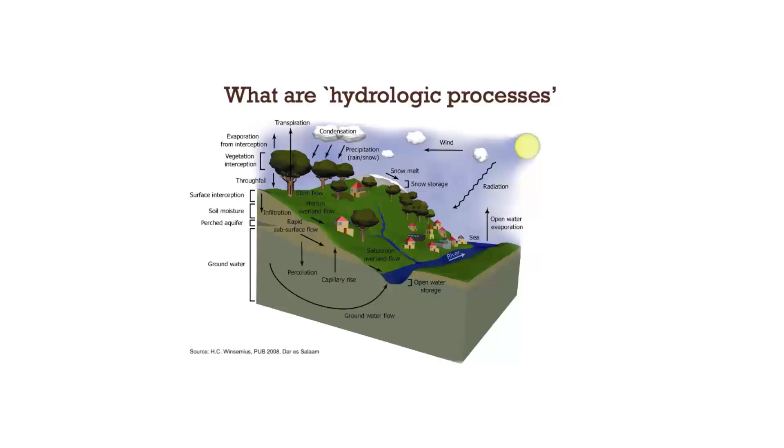Here we want to appreciate this process of the hydrological cycle, which is in short the water cycle, the water balance. After the rain, the whole process of condensation occurs, then it comes along as stem flow. Some water is evaporated, infiltrated, then moved down to the river as runoff, then exposed to bigger water bodies like the ocean.

Some water is taken up by plants, then released again through evaporation or transpiration, condensed, and forms clouds. This cycle continues, and we get flooding when the capacity of the river morphology, the threshold of the river, is exceeded.

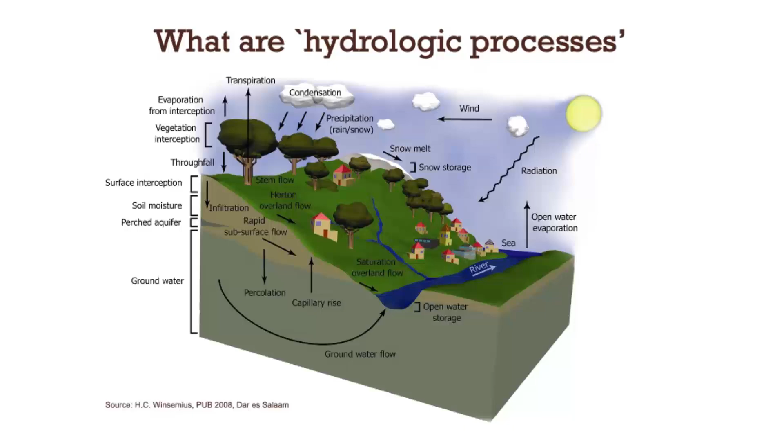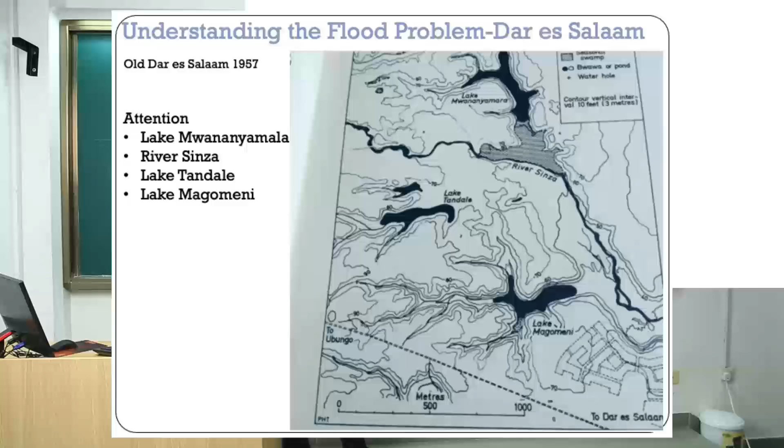So our case study is Dar es Salaam. Let's have a short history of Dar es Salaam. These pictures were taken around the 1950s.

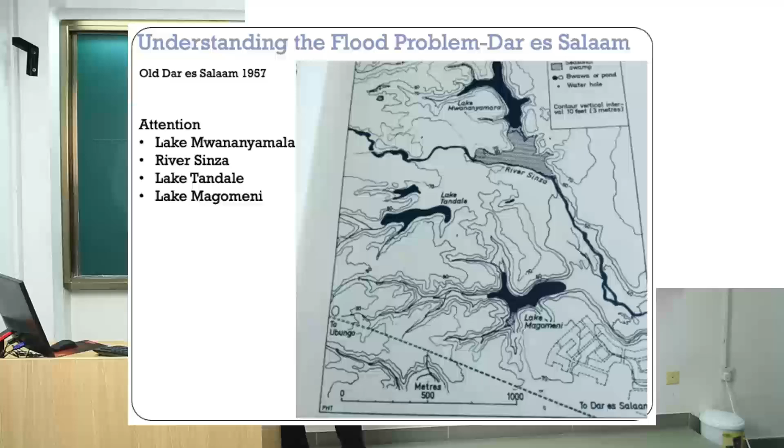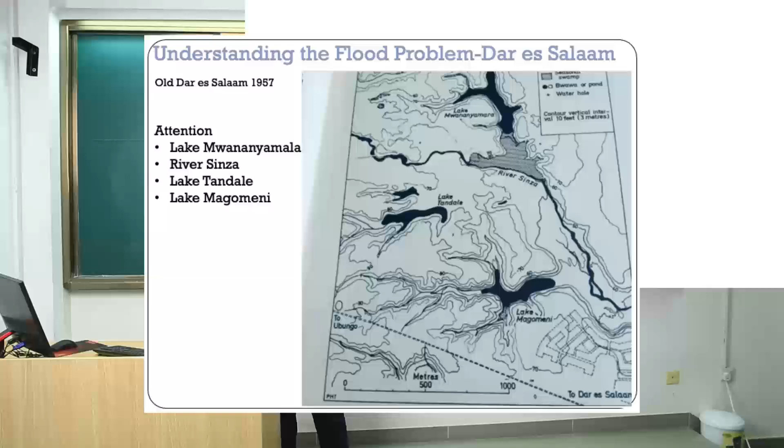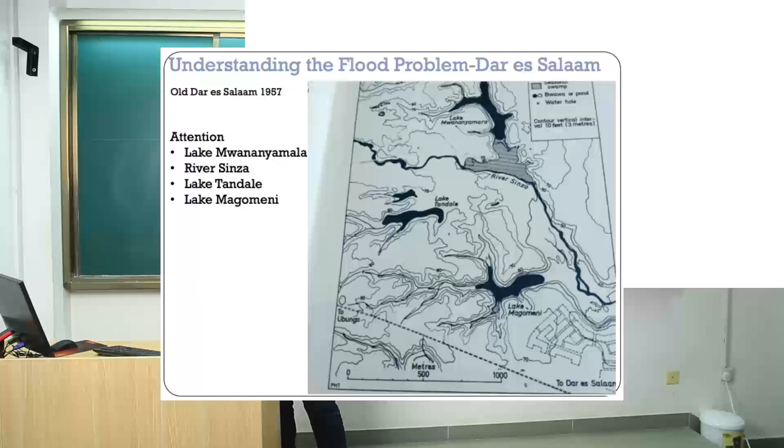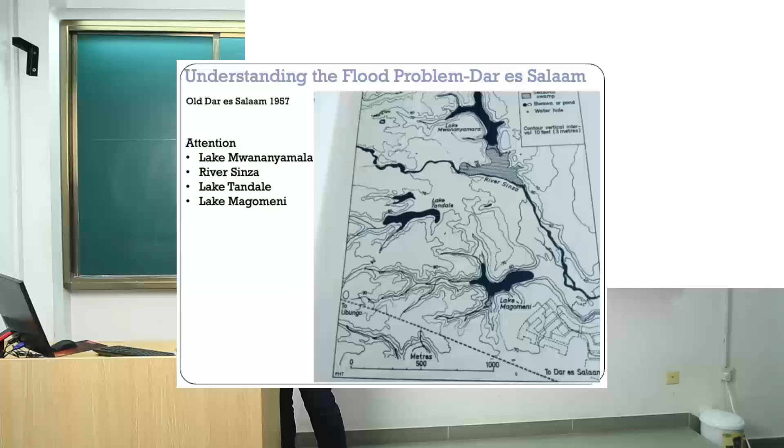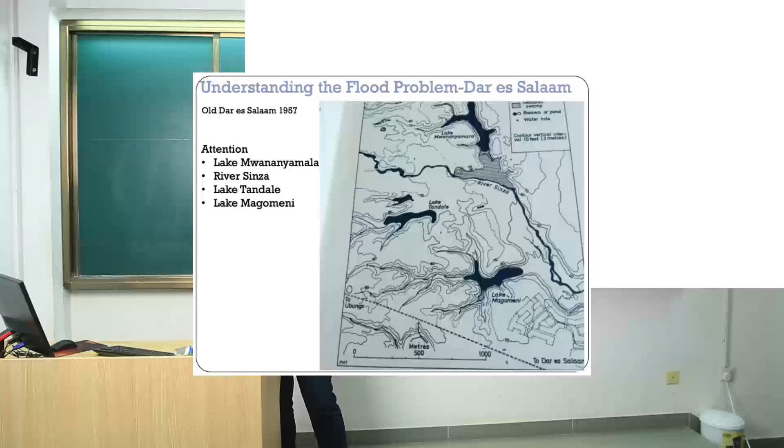We appreciate that back then it was swamp, or lake, or riverway. We see Lake Tandale, Lake Mwananyamala, Lake Magomeni, and River Sinza. These were water bodies, but right now these areas are very urbanized - they are business areas, with a lot of commercial activity and shops.

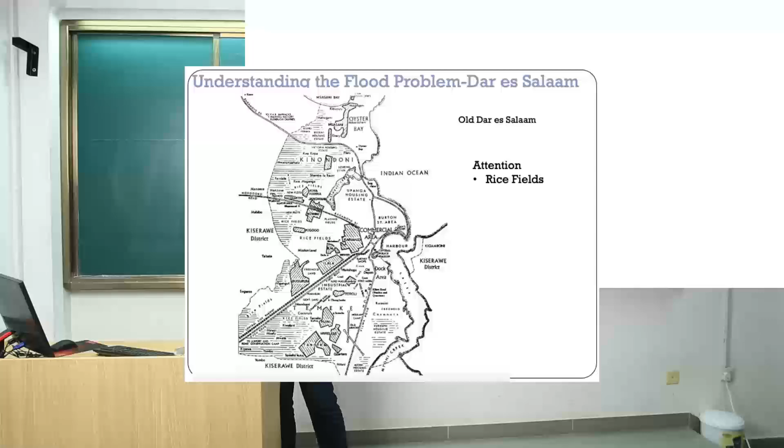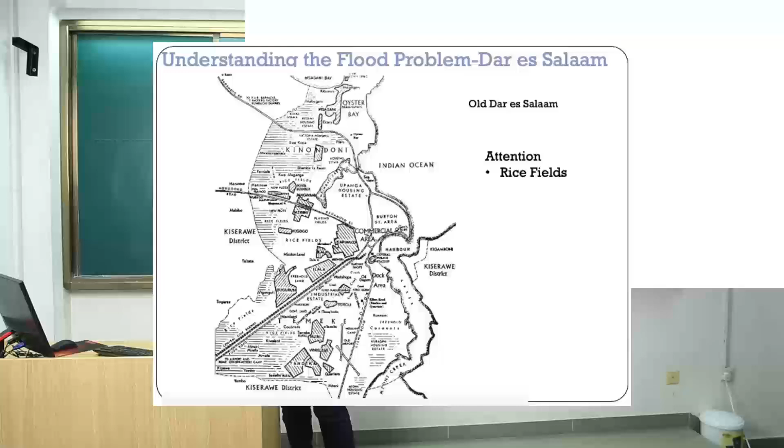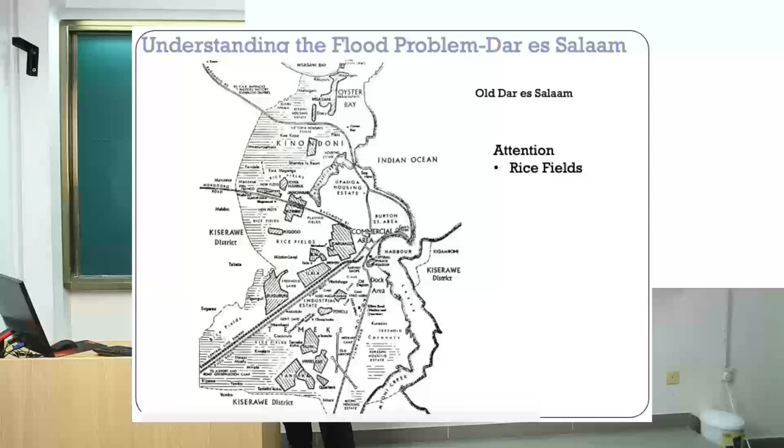Similarly, looking at the history again, we see old Dar es Salaam. Many parts here were rice fields. Right now there are a lot of settlements in these areas - you see a lot of Kigogo areas, Temeke, and places in Kinondoni, where there used to be rice farms.

As of now, after some time, people developed those areas and made settlements there. As the city expands, people saw the potential of converting that land to human settlement and commercial areas. We appreciate that a lot of floods are happening now.

Here we want to appreciate Jangwani. If you see the map, this was the rice field. We get a lot of challenges here - a lot of disruptions, people being moved, especially at Jangwani. People are being called to move, told to move from this area to go to other places.

There's loss of lives, interruption in communications, and this road is not passable during heavy rain.

There are health issues and hazards as well. The River Msimbazi in Dar es Salaam passes through all the places at Vingunguti, taking effluent from abattoirs, places that do butchery. This is an outfall, a bigger drainage draining a large part of Dar es Salaam - this is the Msimbazi River.

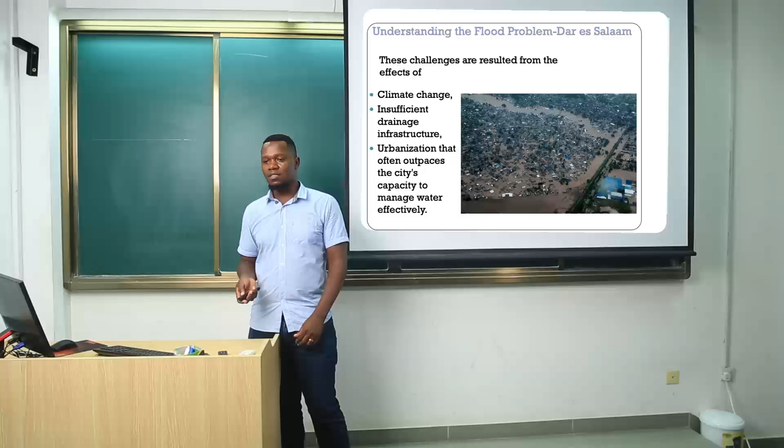Insufficient drainage infrastructure - as we see, River Msimbazi is one of the drainage paths. It's about 4 meters above mean sea level here where it's flat, and the slope to the sea is almost flat. So this draining facility, this draining pathway, is insufficient to drain the water at a time, to drain the peak flood at a time.

As we see again, urbanization - a large part of Tanzanians really like to stay in Dar es Salaam. For those who come to Dar es Salaam, they are just attracted to stay here. So it creates this issue of urbanization, and people see there's potential in staying here in terms of economic growth, connections, whatever. So urbanization in the city is phenomenal.

So let's see, engineers, what have they done so far - the role of engineering, the struggle of engineering in managing these floods. It's still playing a role, as people have gone to areas that maybe should not be developed if the policy could prevent it. But again, it's already there. So what is engineering struggling to do, the role of engineering in general?

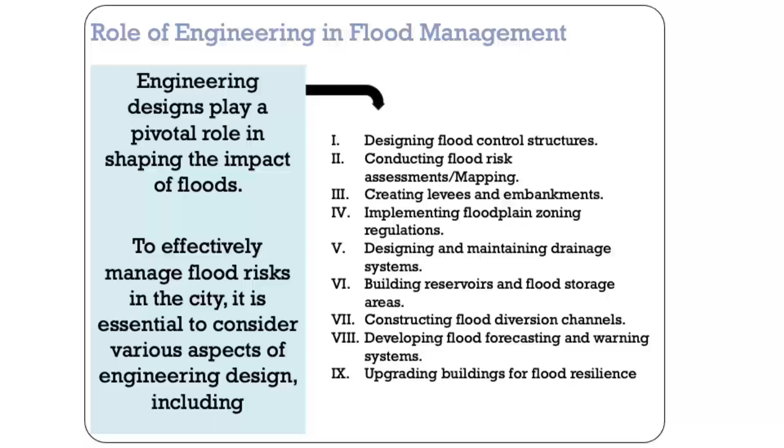Again, in floodplain management, it is zoning those places of floods - zoning those places where flood may occur, so maybe to restrict people or restrict some projects from being there.

What is the ongoing effort here in Dar es Salaam, apart from designing all the drainage structures, putting some effort in the own structures here and there. So let's discuss the continuing effort now, as we appreciate that this is an ongoing project.

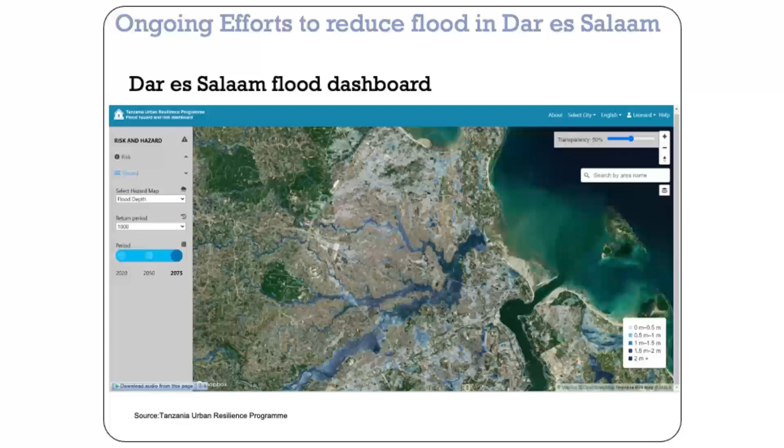I think it is yet to be spread, the issue of creating the Dar es Salaam flood dashboard. Maybe next time it will be done for the whole country, but here it has just started under the Tanzania Urban Resilience Program. They have started creating this flooding dashboard to map the whole Dar es Salaam, showing where the floods will be in maybe 2020, 2050, 2075.

So wherever you want to implement any development project, you can go and see what is the flood extent, how the place is flooded or not, whether the place is prone to flooding or not. So this dashboard just gives an awareness.

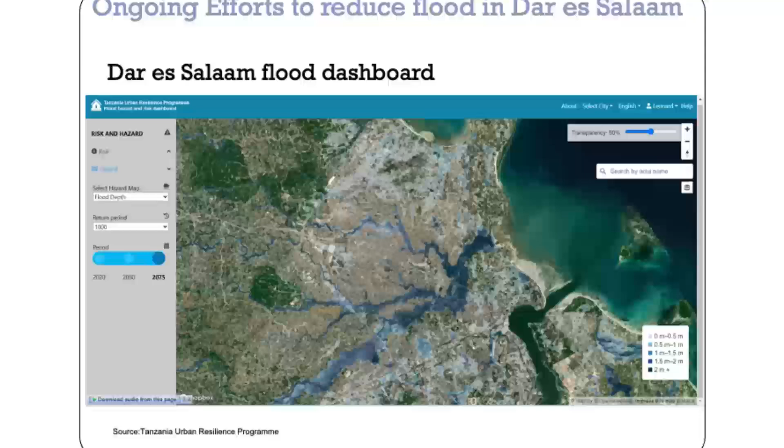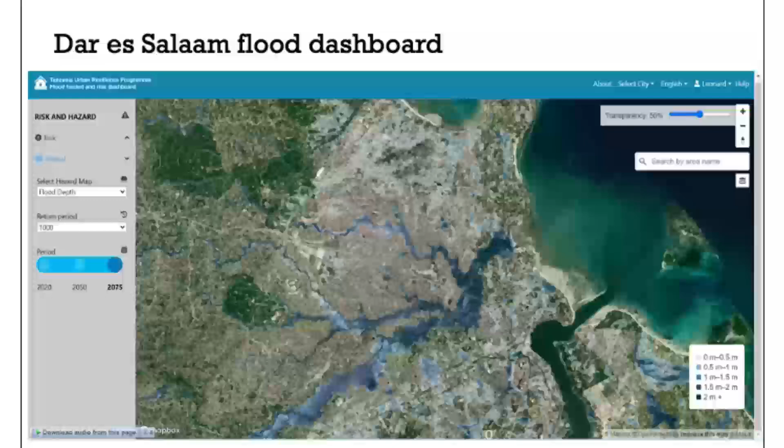So this is just a start. Maybe they will go into more detail, checking the anticipated flooding risk, the number of households, number of people affected, and the cost or loss incurred in USD depending on this flood extent, up to maybe 2020, 2050, 2075. It is just a projection.

As we appreciate, the hydrology part is doing this flood forecasting modeling, so this dashboard is part of it. That is one ongoing effort here in Dar es Salaam. The publicity of this may be worldwide, or it will be under the Tanzania Urban Resilience Program.

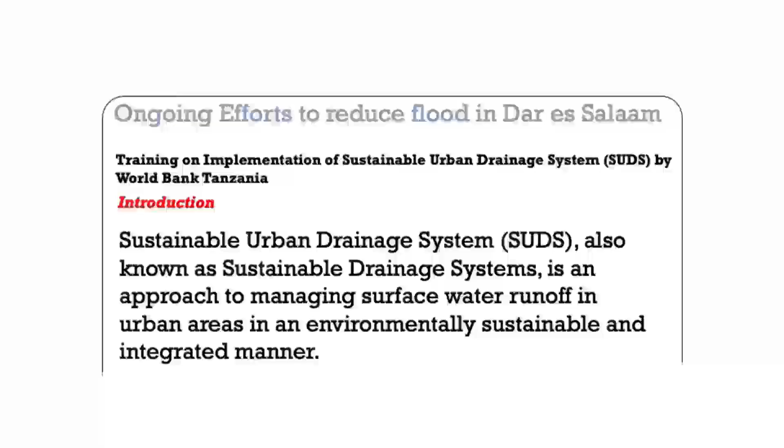Another ongoing effort here in Dar es Salaam is that we appreciate the area was formerly swampy, with lakes and rivers. Now people have just made settlements there. A large part of Dar es Salaam now is built up.

So the training that World Bank Tanzania started or initiated is to think of adapting this sustainable urban drainage system, an approach to manage water runoff in urban areas in an environmentally sustainable and integrated manner. From the vicinity where these floods are occurring, the management starts there.

I've appreciated some of the components of a sustainable urban drainage system. The hydrology team has tried to check some of them. There are infiltration basins, detention ponds, soakaways, infiltration trenches, pervious pavement, and bioretention areas.

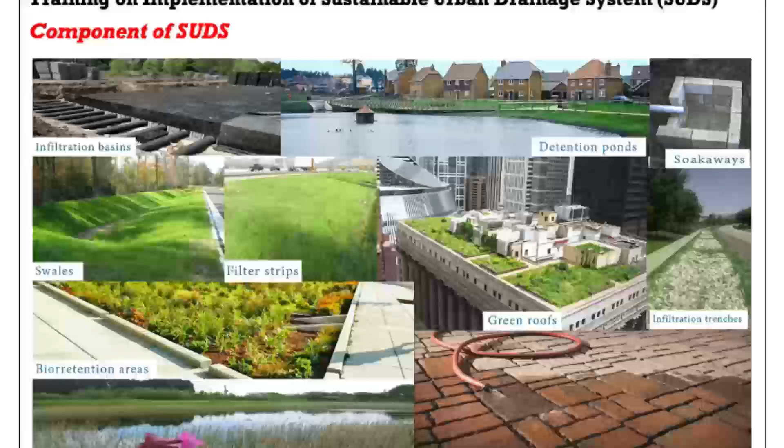In short, this sustainable urban drainage system is trying to convert the watershed back to its original state. People have destroyed the environment, made the ground impervious, and put pavement all over. So this system tries to see the possibility of introducing these SUDS components here and there during the design of the drainage system.

For example, instead of putting a bigger concrete drain, they are thinking to keep the drain as it is but incorporate infiltration-aiding components or facilities, like gravel and planted grasses, to slow down the water and give it a chance to infiltrate into the ground.

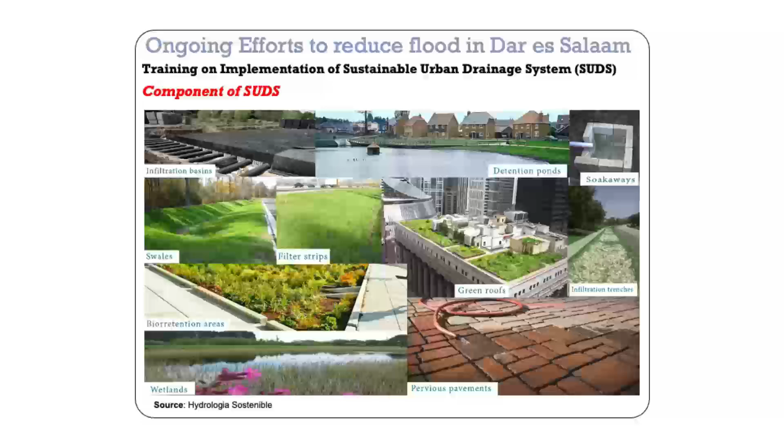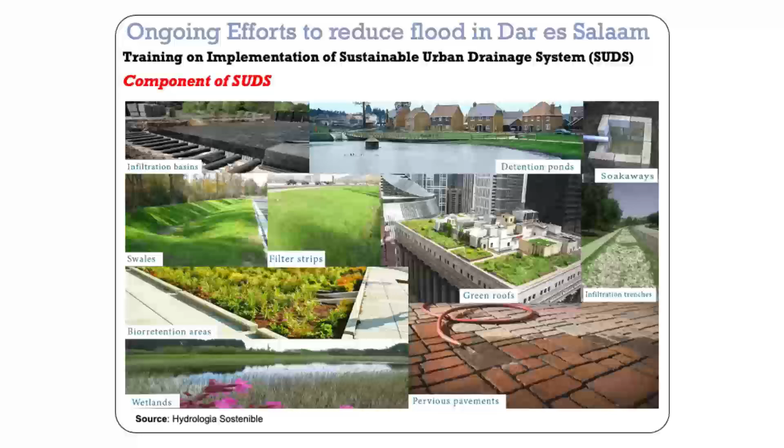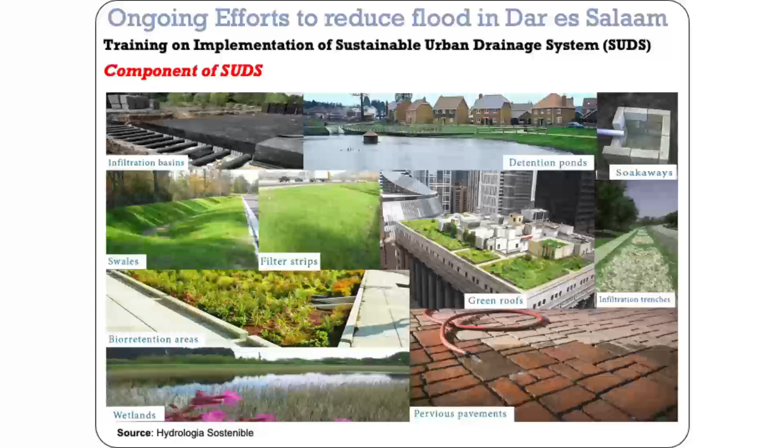As you see, many of these components take in water and give it time to infiltrate. For example, if flash floods are taken into a detention pond, it is allowed to evaporate or infiltrate there, which will be one way to help.

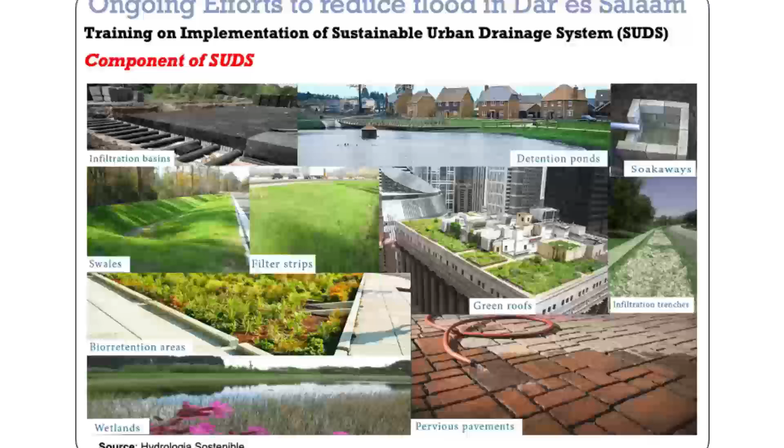If our paving is given spaces to allow seepage, instead of collecting and dumping water into another house or accumulating water down there, then from the vicinity, from the start of these floods and this runoff, we start controlling it from there. That was the idea.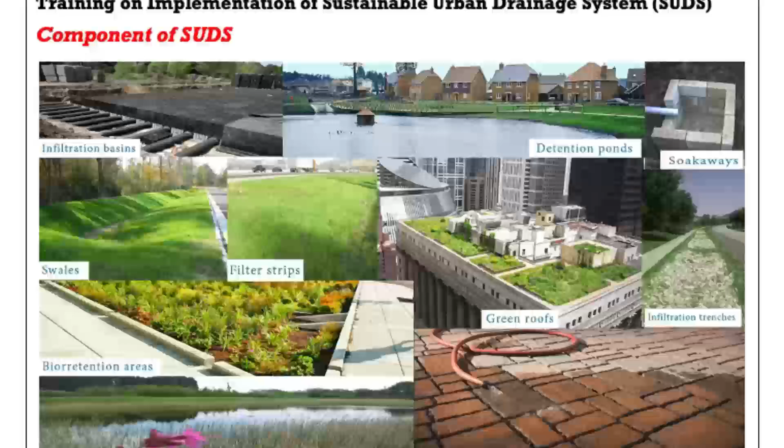If we see, they have this green roof instead of putting iron sheets, instead of putting an impervious roof, they are thinking to incorporate greenery in the roof. So whenever the water impacts there, the water is being absorbed and just drained slowly, instead of being taken straight away to the runoff.

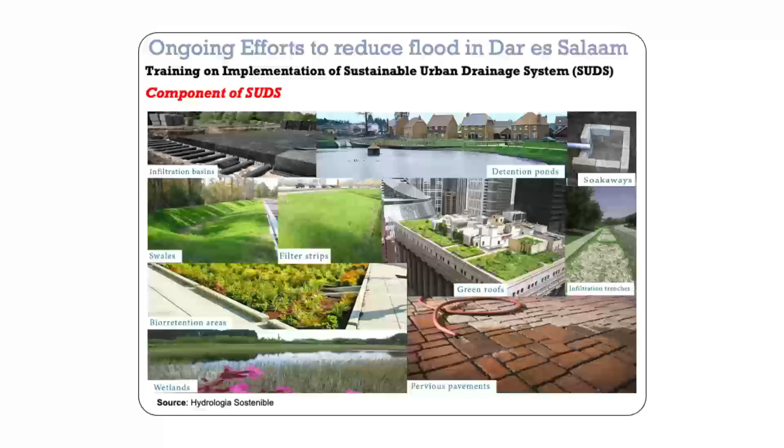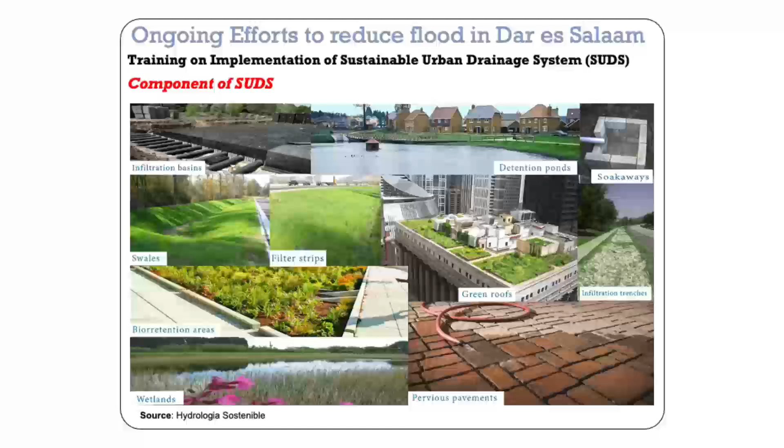They are thinking of having infiltration trenches, if possible infiltration basins. Yeah, and of course again to have the wetlands, to maintain the wetlands. Maybe at Msimbazi in our case, they are thinking to recreate, making that wetland work well for flood control.

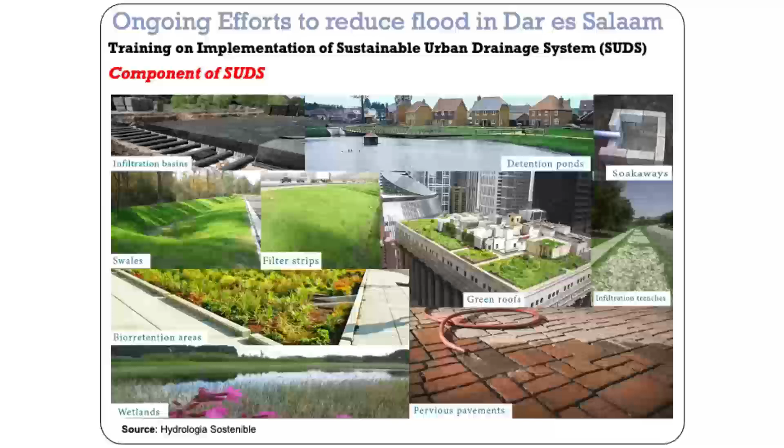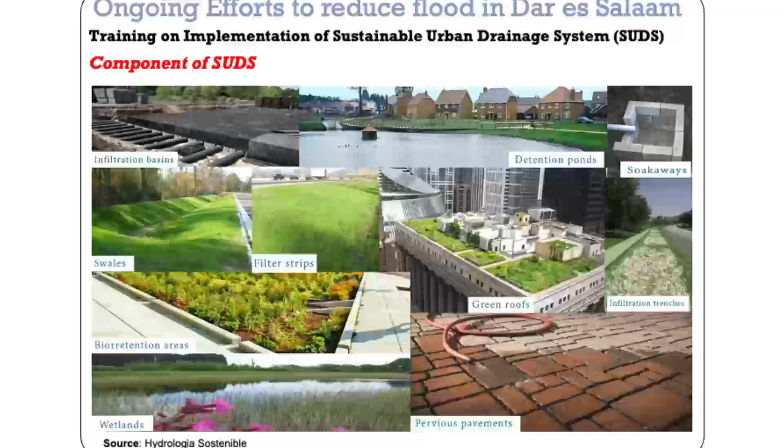So this is being appreciated, is being a continuous effort. Like these SUDs should be part of the design, should be incorporated in the design, should be in the teaching, should be in the engineering. Those consultant firms doing this, those hydrologists, hydraulic engineers, should think of incorporating this in the design.

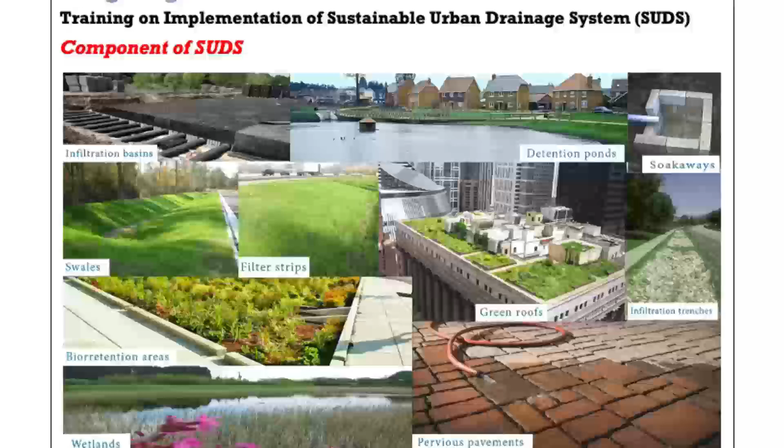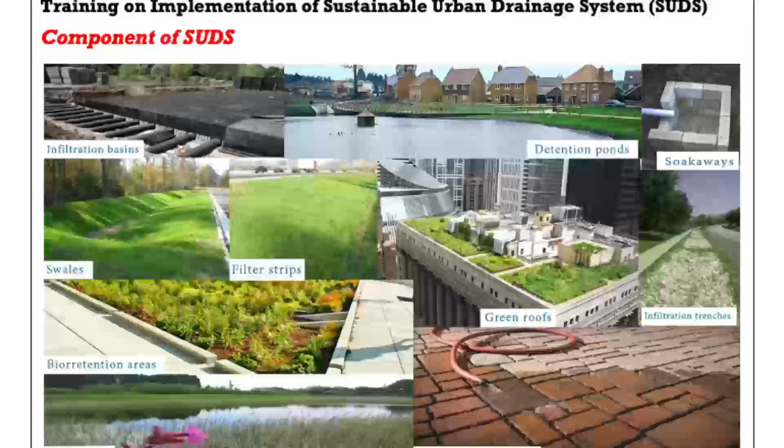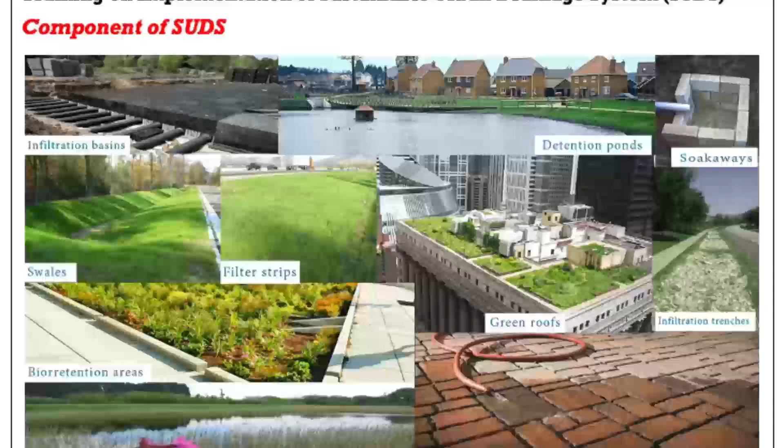Anyway, maybe to have a great understanding of this component of SUDs, there are these permeable surfaces, converting from putting pavings, putting impervious surfaces, converting them to be permeable, maybe allowing some materials to allow water to seep into the ground. So you use material like permeable paving or asphalt that allows rainwater to infiltrate into the ground.

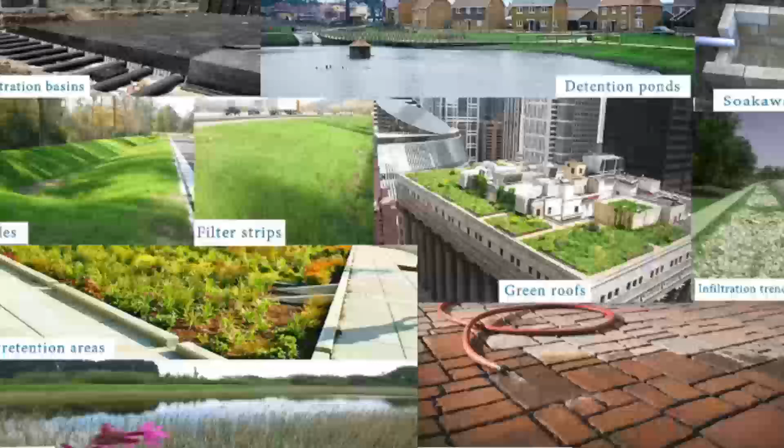There are these swales and ditches, constructing vegetated channels instead of putting plain concrete or stony riprap, whatever. So thinking of putting the vegetated drain so that it reduces the speed of water and gives the water time to settle down, giving the water time to infiltrate.

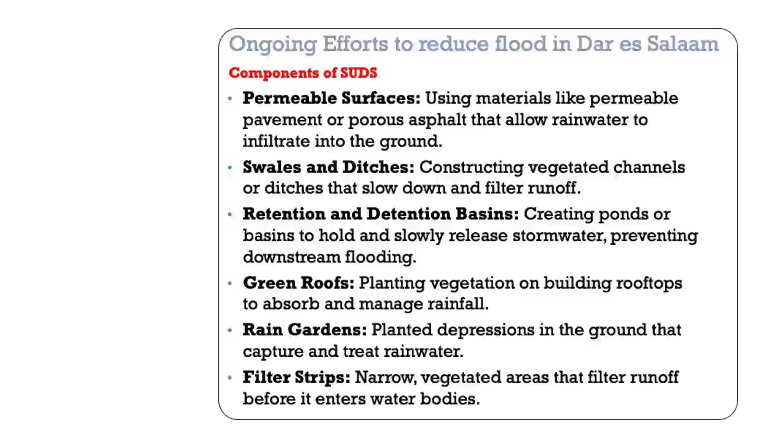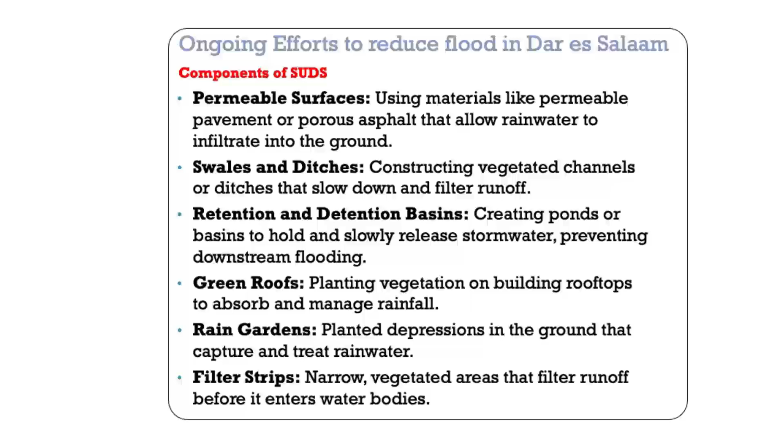So that was an idea. Again, retention and detention basins, creating ponds or basins to hold and slowly release water. The flood is just a matter of that water passing at that time. At other times the water may not be there, but when the heavy rain hits, that flash water is passing at that time, so the destruction is happening just at that time.

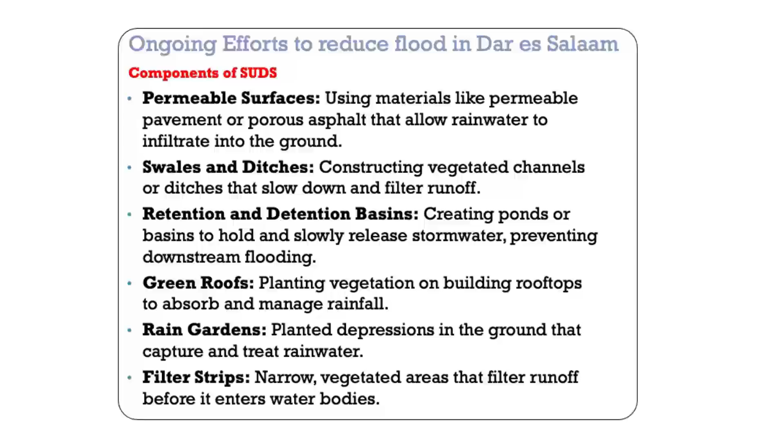So they are thinking to have these detention or retention ponds that hold water at the time it attenuates the hydrograph, it reduces the tension of this water. So holding the water when the heavy rain hits and the runoff is high, then releasing it slowly as stormwater, preventing downstream flooding. Having the green roof, as we see, the roofs are the very primary source of this runoff.

As water hits the roof, it goes slowly, it goes down to the ground. So from there, when the rainwater hits, it's being captured in the green roof. That was another idea. Rain gardens, to have rain gardens around, not just putting pavement in the house, but having rain gardens whenever water is being directed there.

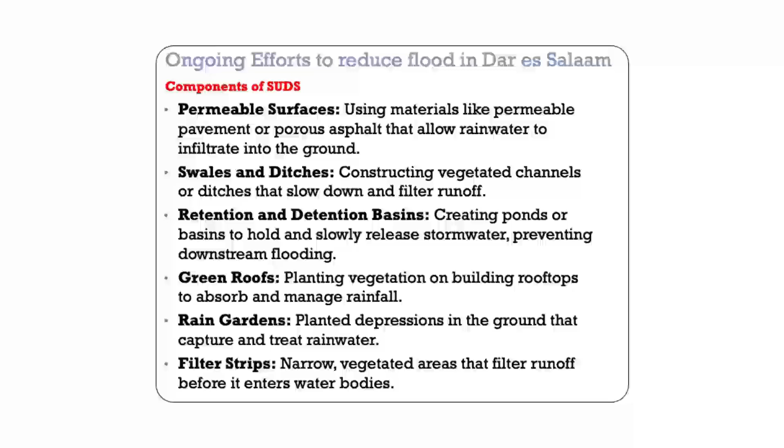Filter strips, narrow vegetated strips that filter runoff before entering the water body. It's just like we put gravels in the water path before it reaches maybe a bigger water body. We put these porous filter strips so water can be infiltrated there.

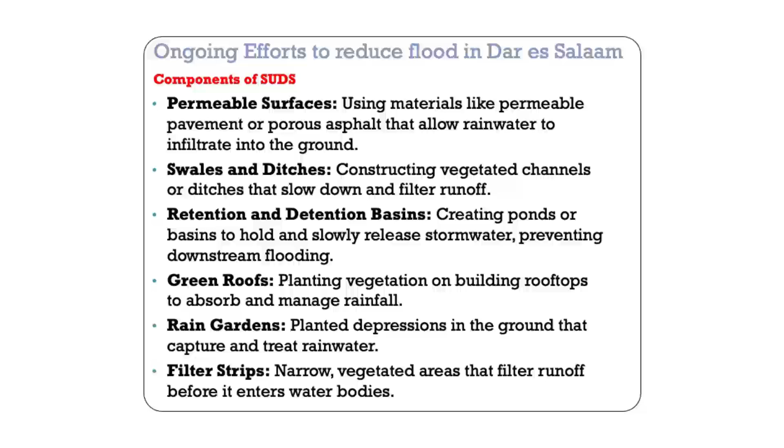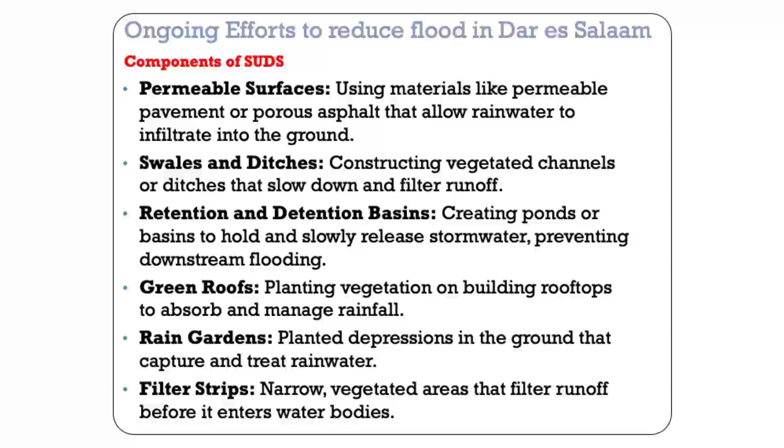So that is minimizing the flood. Water quality is the issue of water quality. Is the water passing through the vegetation instead of passing in just concrete, taking all the waste, taking all the debris, taking all the thrown material into the drainage. So it's just passing in the vegetation, so the issue of water quality will be aided in that way.

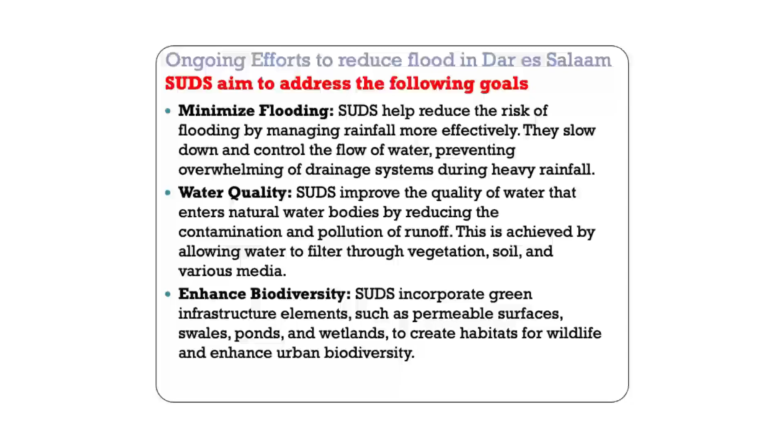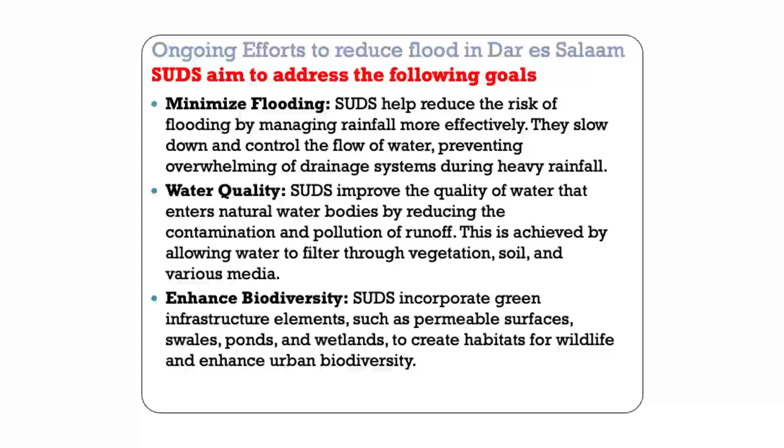Again, it's to enhance biodiversity. You say SUDs incorporate green infrastructure elements, permeable surfaces. It's creating habitation for some microorganisms and some organisms. So creating wetlands, creating this vegetation, nature, it gives room for biodiversity. It gives room and environment for other organisms, microorganisms to live and to appreciate biodiversity as well.

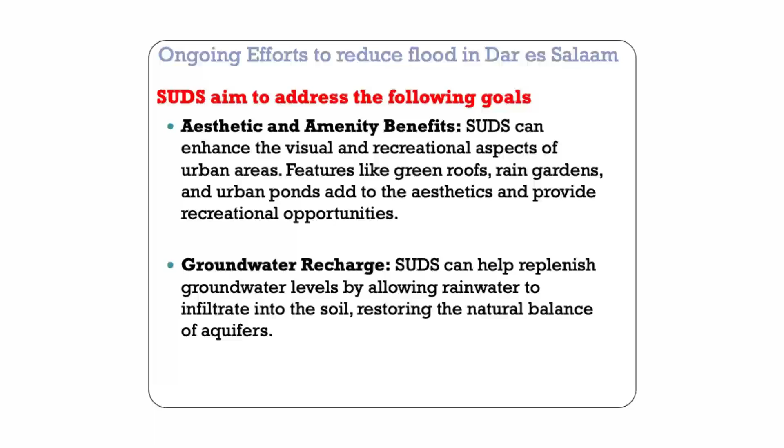Again, it's in terms of aesthetics, amenity, the gardens, the greenish environment, it looks nice, recreation-wise, it looks nice in terms of looking. So the issue of aesthetic, amenity benefit has been one of these purposes of these SUDs.

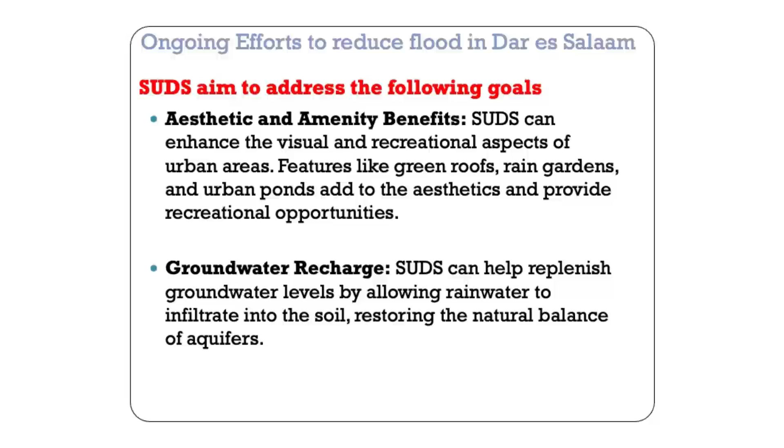So groundwater recharge again, as we give room for that water to penetrate into the ground, we appreciate that the ground will be recharged. The base flow, we aid the base flow. So SUDs give room, instead of allowing that water to go directly to the ocean, those stormwaters directly to the ocean, trapping them and giving them room to infiltrate into the ground will be good, it can be used again. So one of the issues here in SUDs is giving room for groundwater recharge.

In fact, let's see the comprehensive worldwide approach in flood management. As you see from the Flood Hub, they have developed this.

This is a catchment management approach that can be one of the very best, just thinking maybe some of the factors to be incorporated. This is the bigger picture approach developed by the Flood Hub, the Newground community.

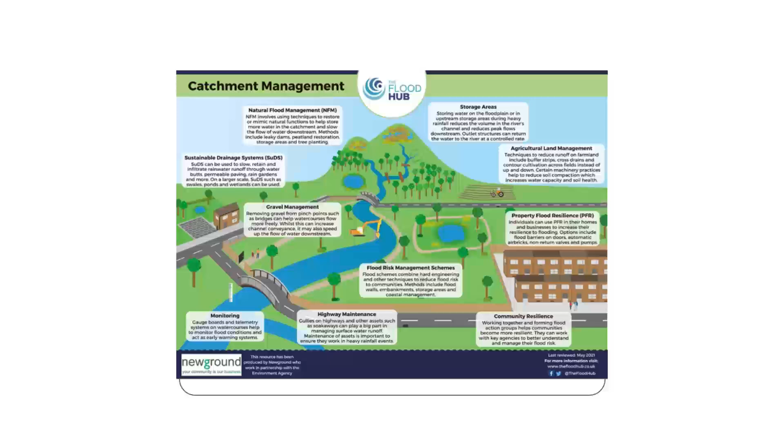Again, the issue of monitoring. They are thinking of a bigger approach, like putting monitoring gauge boards, the telemetry system. This will give feedback to aid the process of the flood early warning system. This helps in modeling, prediction, and different research. So in different flood research, this data - they are thinking that if we have this monitoring and telemetry, it can be incorporated in the flood early warning system.

We have to have the baseline data to see the quantity of water passing. So this monitoring instrument is the one measuring water here. With time we'll have data on the quantity of water here, and if the sediment can also be monitored - if sediment is reducing or increasing, if the flood is increasing or reducing - this will give the answer.

So this can help us appreciate all these efforts - how are they continuing, how are they doing, how effective are they? This can be seen in the monitoring rate.

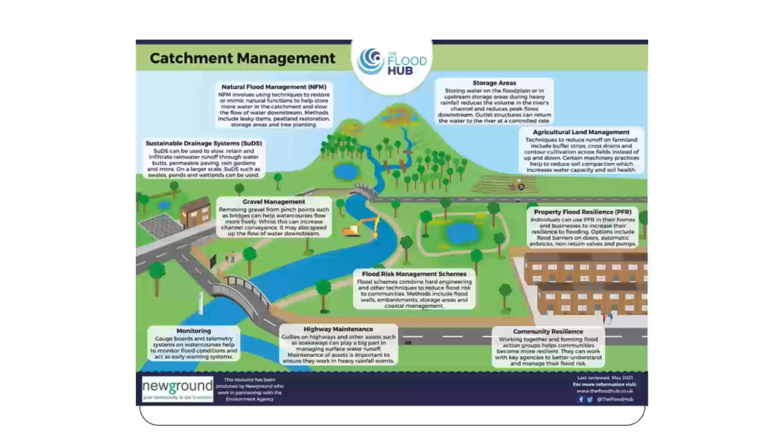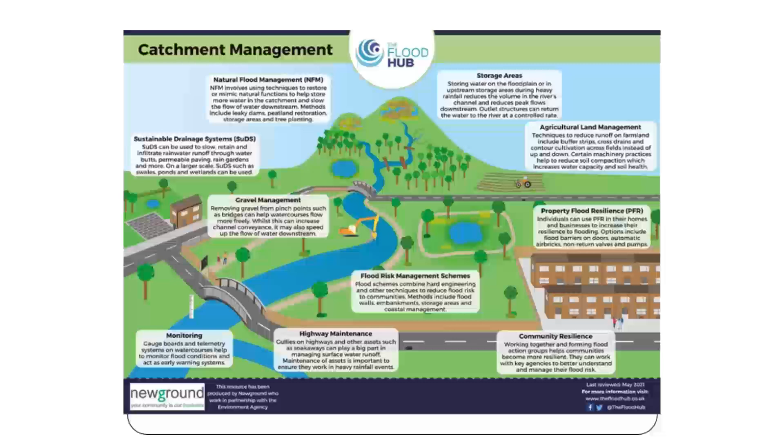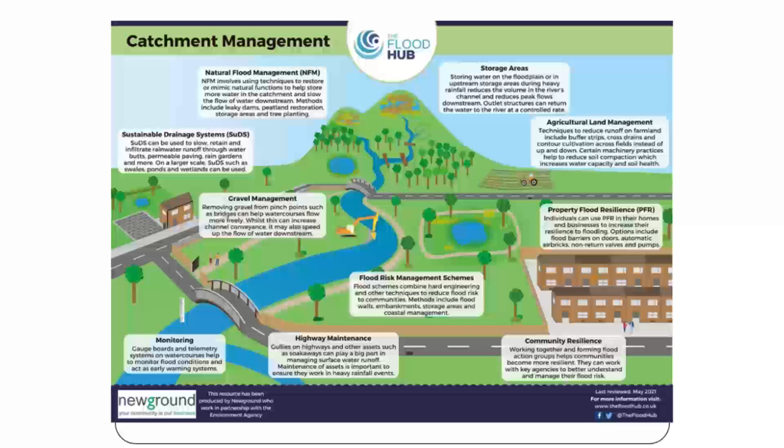Again, in the issue of buildings, we say that buildings need to be flood resilient. We can have a green roof to tap the water, or we can have a rainwater harvest system. You can think of having a rainwater harvest system, having a basin around, or having tanks around to tap the water there. If you're not tapping that water, maybe have a green roof that will tap the water for some time and then just release it.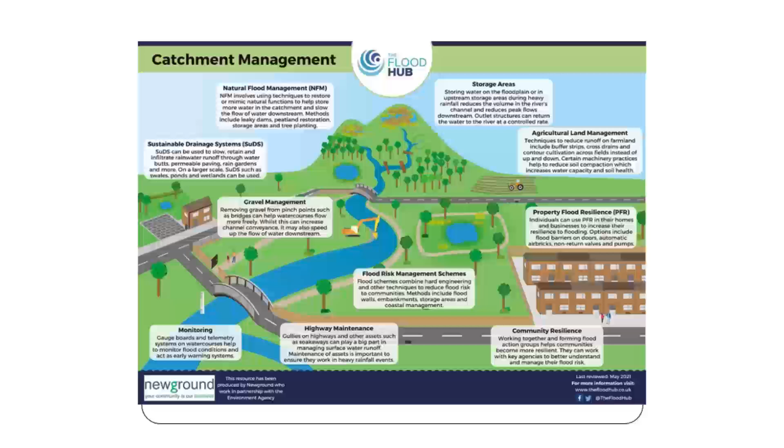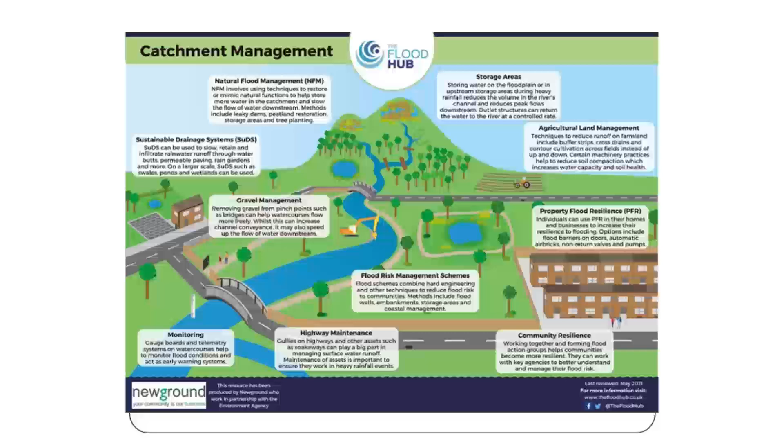In terms of community resilience, they can put the community being aware of the flood, to incorporate the community in the issue of flood mitigation, to let the community know the steps that scientists, engineers and experts are taking, so the community can be part of it and help in flood management.

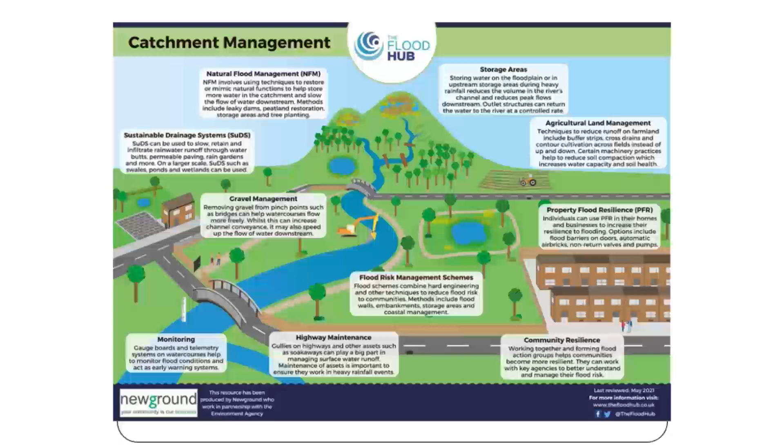The other issue is maintaining highways, having roads with good drainage structures - culverts, bridges, open channels, ditches - well drained, well designed, so that it will not affect the community.

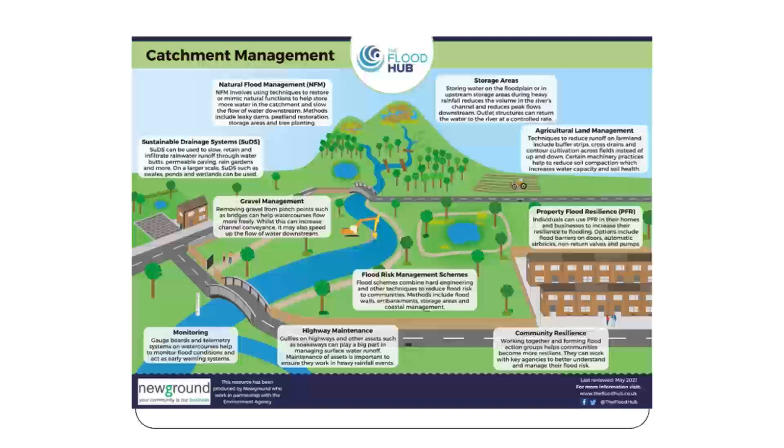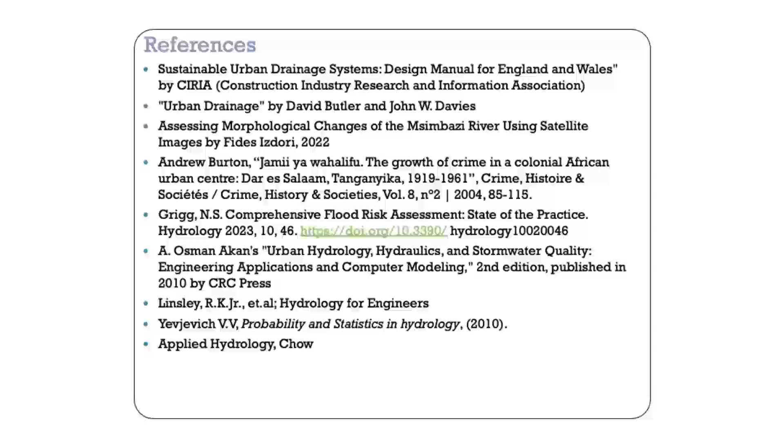So to appreciate the references, there are a few references we go through - the issue of drainage, urban drainage here in Dar es Salaam, the history of Dar es Salaam, and the hydrology as well. These are a few references that we appreciate; there are many, but these are a few.

So I welcome the discussion, comments, to have the views, to comment, to see where we can improve, where we can go about, where we can make our city safe from flooding.